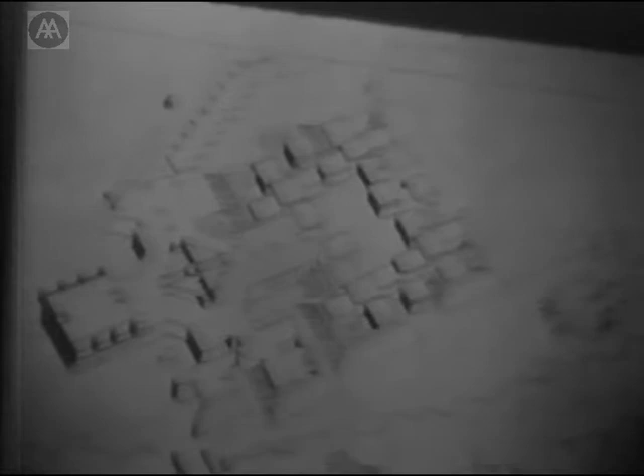And here, as a juxtaposition, the question of the use of surfaces. This was a project I did for Copenhagen, where you go to the extreme and you can walk on the whole of Copenhagen above the buildings.

Here, another project which incorporates, among others, this idea—again a competition, for which I won first prize, and we are supposed to construct.

It was also very important to leave some of the dominating features of this cityscape intact. And here we are now, the first building of this educational center is the museum, and here we are at the museum building.

Here it is more in detail. Again, the hatched area is the pedestrian area, which then later extends into the other areas of the educational center. Here you have a schematic section which explains itself.

You pass through. Here you have the center. You pass through. You are on this bridge. You have a view over the city, and then you have a little temple, sort of as a symbol for the museum. And you enter the museum, which then again splits into 3 levels and has also daylight areas. Or you walk down on the building. In the summer you can enter from several levels and into these green areas.

Is this in focus? Or?

This, for those interested in art, is an indication of the collection.

The whole project was based on two legs really. One was the urban situation, which I briefly explained and may go into more. The other was the collection and the structuring of the collection.

We had the good luck of working with the director of the museum for several months to evolve the program, because the original program just said such and such number of square feet of collection area.

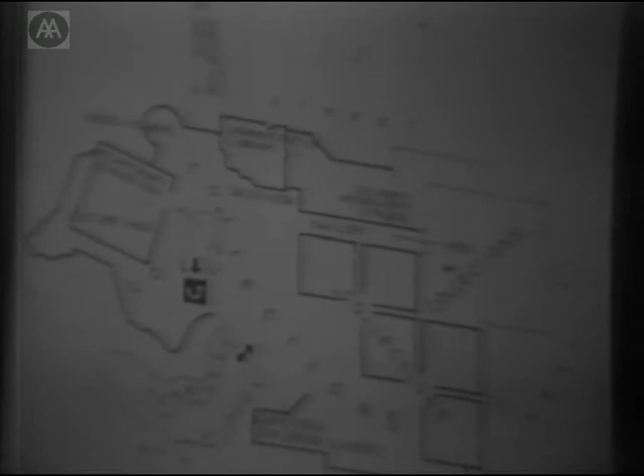Out of this and the urban situation, we arrived at this basic concept, where the more flexible, less individual parts of the collection are in this kind of pool, and from this, in cloverleaf fashion, you can enter at strategic points into the more isolated rooms, which you can easily read here.

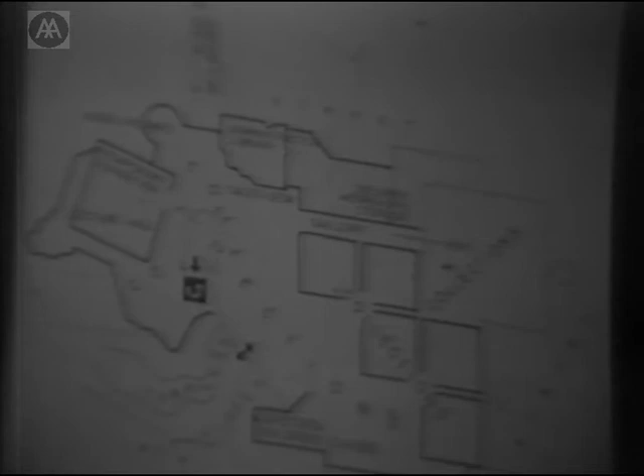This is a superimposition really of floors. You have children's painting classes in the cafeteria, temporary exhibitions, lecture rooms, workshops, etc, and a possibility of mixing indoor and outdoor activities.

Here you see the thing in isometric. This is the area of the daylight rooms. This is the administration tower and artists' apartments.

Then for the staff and the watchmen, the spaces where they have dining rooms etc, and here the temporary collection. Here the entrance, and here the possibility to walk down, or even go down with a wheelchair or a baby carriage.

These are parts of the old city walls, here and here, and we took up the motif and the material of these old city walls.

This gives you a better idea. You have this platform here. Here will be the future connection you saw on the isometric, with the other parts of the cultural center.

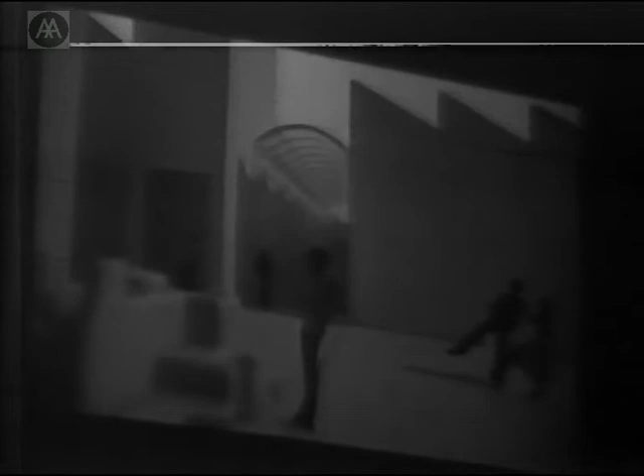You have objects of art here, but also, and this is very important, it's a city where you don't have, like in a big city such as London or New York, a trained museum-going public. So you have to induce people to go into the museum. You have to relieve their hesitance to go in, because they think there are things of high art going on to which they don't belong. So both activity on the outside and also view into the museum from this pedestrian area is important.

And you see that normal people move up and down the stairs, and you see what is exhibited there. Or you can just look at the view.

You can have a lesson in Gothic architecture directly from the museum. Here you see this entrance pavilion, and here you see how you walk down these terraces, and again can look in, and in the summer even enter. You see again what activities are happening here from the outside, or in the evening you get an idea. And then you are down in the garden and just look back at the building.

Again, a museum and an intervention into an old fabric of a city: the proposal for part of the Museum of Modern Art in Florence. You may know Richard Meier's project, who also designed a part there. This is Florence, this is the Arno, here is San Miniato, Forte Belvedere, the next hill, and on this hill is the Villa Strozzi, which has a villa proper, an orangery, and stables. These stables and carriage houses are partly used and partly extended to form a museum of art.

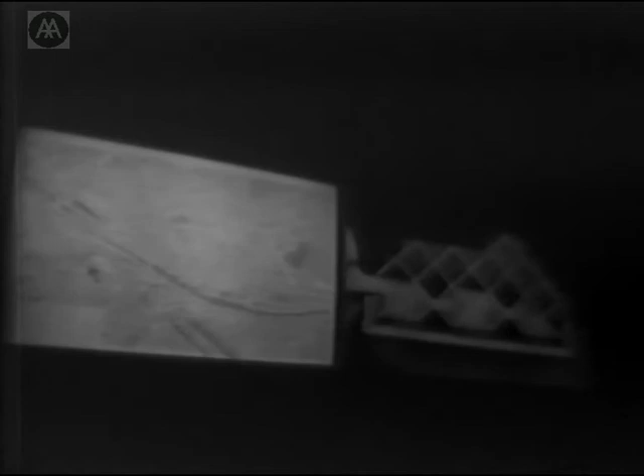The location is very important. Going back to this slide, the Florence most tourists know is this Florence—the Duomo, the Signoria, the Palazzo Pitti—and they rarely ever go beyond that. The real Florence, very telling in this map, is here. About 70% of the population lives in this area, the working-class quarters, but as a tourist you rarely go there unless you happen to take a drive down.

So this will be an important link, and also the closest cultural institution for this area. The city has bought this palace and grounds, and the gardens are open to the public.

Here you see the basic system: you leave certain parts protected as monuments by the Soprintendenza dei Monumenti, and other parts are just added as new structures. Richard worked practically completely independently—we had only one coordinative meeting—but I used very much the same system.

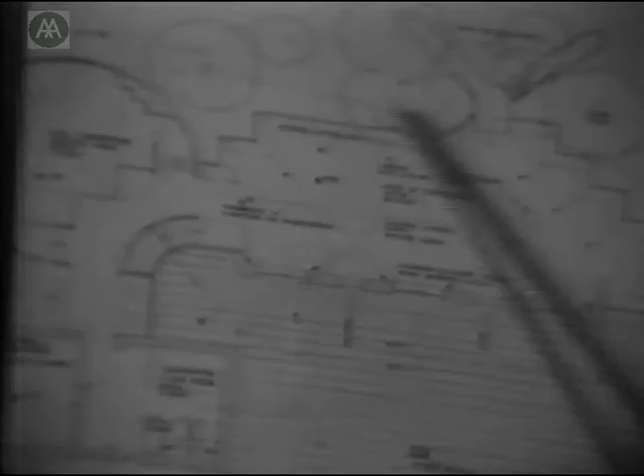Here you see the plans, the lower floor plan. I kept this little piazza, and we made the entrances through the small doors. Here's the big sculpture hall, an auditorium, painting hall, video rooms above, and a gallery balcony above the painting gallery. This is Richard Meier's object.

It's on the hill—the stables are strangely on the hill. They were built there because the villa itself was not supposed to be on the hill; the Strozzis were in a kind of exile and were not supposed to look back on Florence. So the villa is on the lower part, dealt with by Scarpa and Gardella. Here you see the old facades with prominent trees and light openings, just in front of the entrance door, and the sculpture hall with the balcony and the auditorium.

This is one run through on one aspect of some proposals made at Foxton.

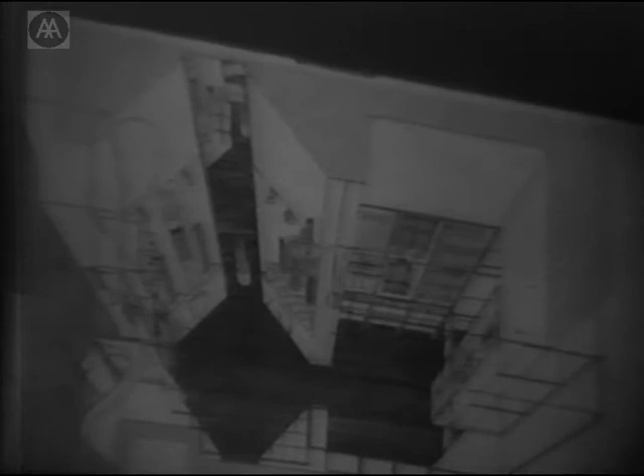So the idea was for me to see how I can enlarge this space by both real and imaginary, or psychological, means. The first thing was to make the entrance very narrow and long, so that you are squeezed together, and then once you're squeezed through here, you feel a kind of relief. So the small space feels bigger. This is oversimplification, but I have to be short.

Then you suddenly end up in an intersection of axes where you have one glimpse into the indefinite, and where you are confronted with what you get there, which are candles, and then you enter the storage where you can pick the candles you want.

From the outside, I closed the shop as much as possible because I thought you get the message once you see one candle or two. You get candles there, and you don't have to show 100 candles.

So you see the showcases are turned towards the sidewalk, because only the one who walks on this sidewalk can really see it. This is a view from the other side of the street, from the other sidewalk, and there the interior lighting is used as a kind of common lighting. There are no outside neon signs or anything.

This is the air conditioning, which is clearly expressed. The whole thing is done out of 2 millimeter aluminum, anodized, glued with epoxy resin. It's an idea I got from reading about British aircraft construction.

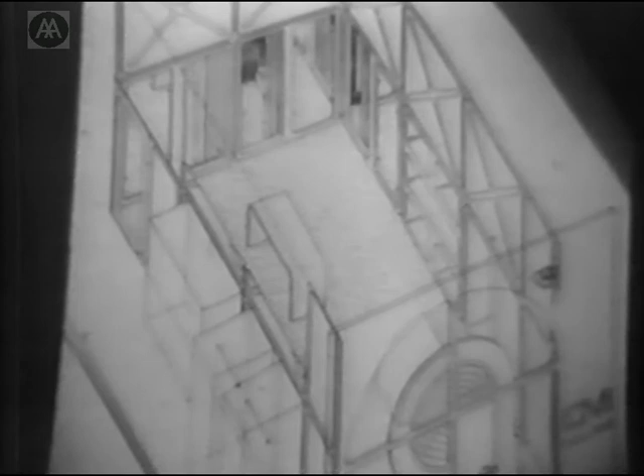So here you have the interior, just a very quick look. Here you see, for instance, the imaginary architecture. You extend the space by mirrors, and you do it in such a way that the complete image is composed out of the real and the imaginary. All details are made like this, and even the cylinder here can be extended and changed around, and you just put into these panels this element or that element, or you have a changing booth or whatever it is, and you can flip things around on this basic grid here.

So the important thing is this, and out from this module, everything can extend outwards or inwards. This shows you detail, this shows you how the problem has been solved, how to not bump into an incoming person. And that's a shop 8 or 7 years after the candle shop 3 years ago.

Again here, sort of the semiotic aspect has been very strong. It's a jewelry store, and the whole design of the shop should carry this simplest message. So you did not want to write jewelry or something, but now there's always a problem that these things, it looks very costly. It is also not cheap.

But anyway, still you have, like here, it is in the main shopping district in Vienna. But the condition was that the shop costs as much as any other shop in that area, on that level, would cost. But I always try to incorporate necessary features, like here, this is again the air conditioning. These are the exhausts, and these counters here are the intakes. So this is not merely a freely designed object, but it also serves a purpose, and it of course provokes a lot of associations. In this case, this is Baltic granite and 3 types of brass.

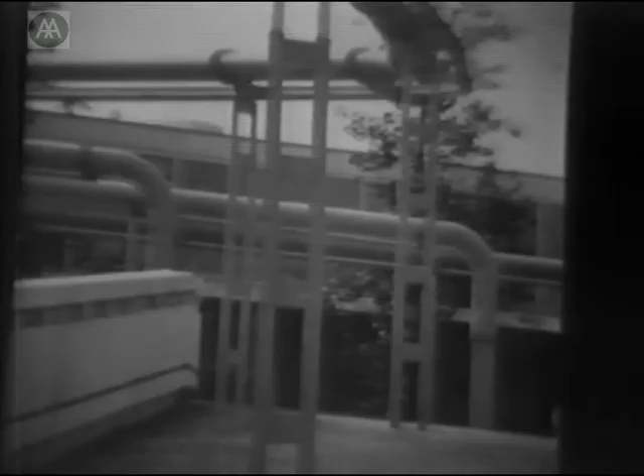Here you see it on a section. Well, now... then let's go. Well, this was wrong now, I'm getting confused too. Well,

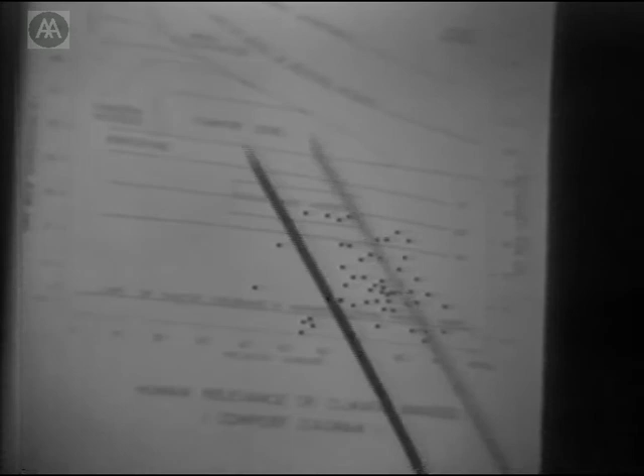This is a comfort diagram. I'll show you the relevant examples - you have 2 relevant examples. This shows a comfort diagram and the conditions in January at 2 o'clock, with figures for a number of 40 years distributed. This shows that the temperatures are very low here, making outdoor environmental conditioning of that kind meaningless. The idea of this heating and cooling isn't that you can stay outdoors in January, but rather in the intermediate seasons, like October or March or April, where you sometimes have a few hours or days of lower temperature, or in high summer, very hot like today.

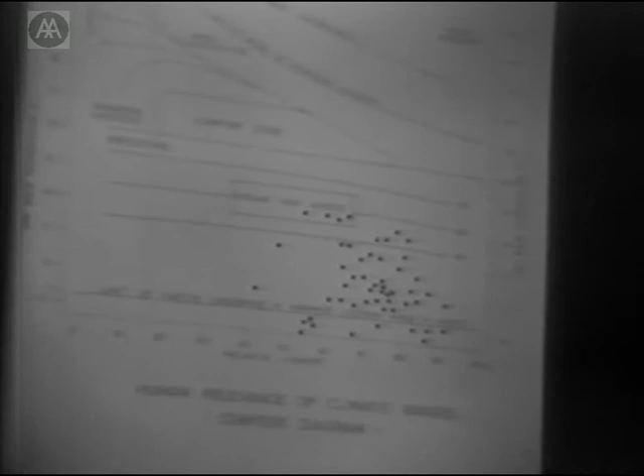Now here, for instance, you have October at 2 o'clock, and you see that a lot of these figures fall into the comfort zone. This means that with only a slight addition, for instance through infrared heating, you can push these few points up into the comfort zone, and you can still have outdoor life.

This shows you this again - a system which, as I told you, at certain points agglomerates, and through this system of agglomeration where lines run parallel, you can, besides the things I told you already, put in the roofs, the sunshades. Here you see a spotlight. Here you see a watertight encased projector. Here you see a panel you can push, etc.

Now here, for instance, you see how the atmosphere is under such an area when you have the sunshades, or here you have the forum area. The red steps are the heated steps. Here you have what you don't see on the slides - a water curtain, like a Persian chadar, water running down from a fountain. Here you see the roll-down walls, for instance. This is the amphitheater, the forum, and you can close it off by these walls if you want.

Now here again you see one of these roll-down walls in detail. A speaker here, a jet here. This shows a plug-in point in detail, and the detail of the light, how this is attached to it. Here you see one of those panels for exhibition posters, etc. Here you see a detail - you just push it in. The whole thing is based on three holes in this double metal connector.

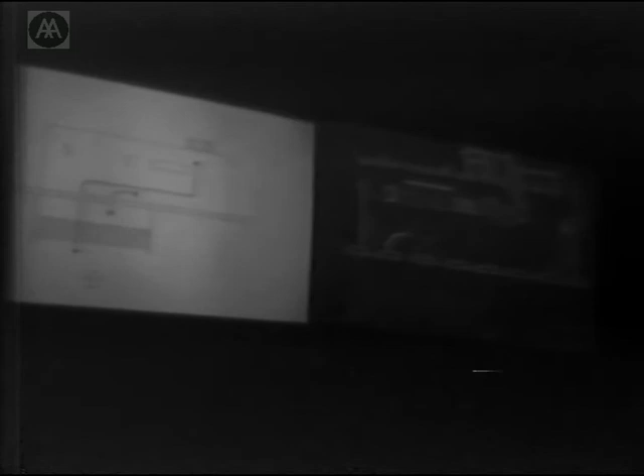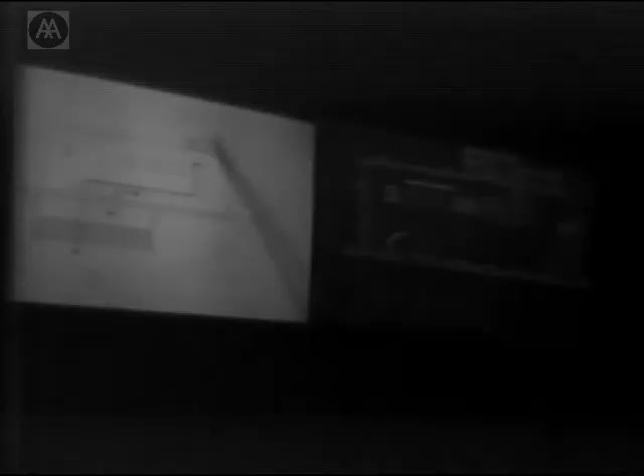It shows here, and I show you just some examples. You have this stair, and the only possibility to put an elevator was here. And this is the entrance hall. The problem was how to bring people in a hall where you have nothing except the reception to the elevator. Here you see the plan of this hall.

As I said, nothing is left in the interior, except that the arches you saw on the outside also reflect into the inside as spatial elements - this motif was taken up. The bearing structure you see here you cannot remove, and there was the condition for a revolving door, so this suggested a circular shape and space. Here you have a reception, the elevators, and two sitting areas - I'll show you how this looks.

You have a sort of inverted canopy here at the entrance. This is the entrance desk. This is a screen influenced by a screen in one of the detached houses at the Katsura Palace, made out of white marble and green quartzite.

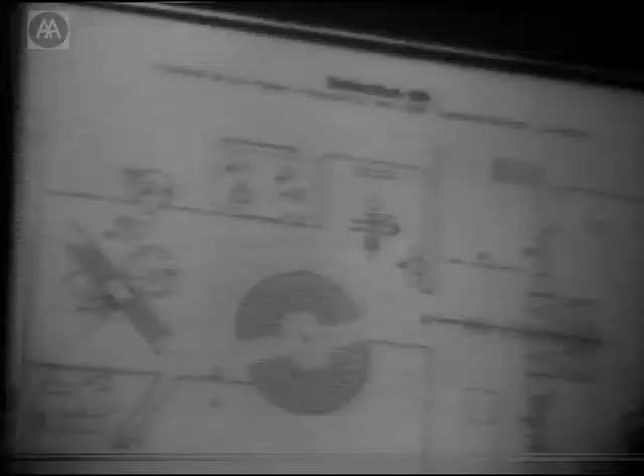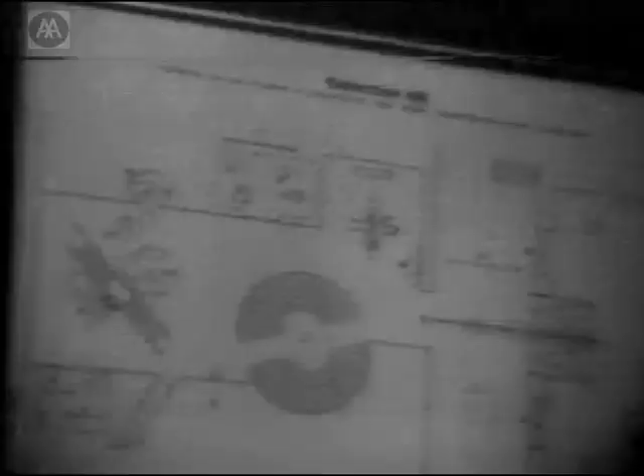I'll close now with a quick run-through of some pictures of a third aspect I talked about in Folkestone, and that is exhibitions. Exhibitions to me have always been a ground of experimentation, a field for trying out things, because it's impermanent and it has a different spirit - you can do more.

Regulations are sometimes less severe - I'm doing an exhibition now in New York where regulations are very severe. But anyway, I don't want to go into this very much. A mass product of Austria: snow.

So you walk through an artificial blizzard. Or there was a product there which you could carry with you or put on your face - glasses - but you couldn't put in your pocket, so it served as an extension of the exhibition. You could wear it, carry it, or throw it away - each of these options we liked, but you couldn't hide it in your pocket. So you had this red, white, red, the Austrian colors, glasses all over.

This is an exhibition on paper, in which I showed the duality and ambivalence of paper - paper good or bad, like burning paper: that paper burns is good and bad, and that it rots is good and bad. This duality, this ambivalence, was shown by a dividing line, with each side always showing one aspect: old and new, past and present, raw product and end product, pre-paper time and post-paper products.